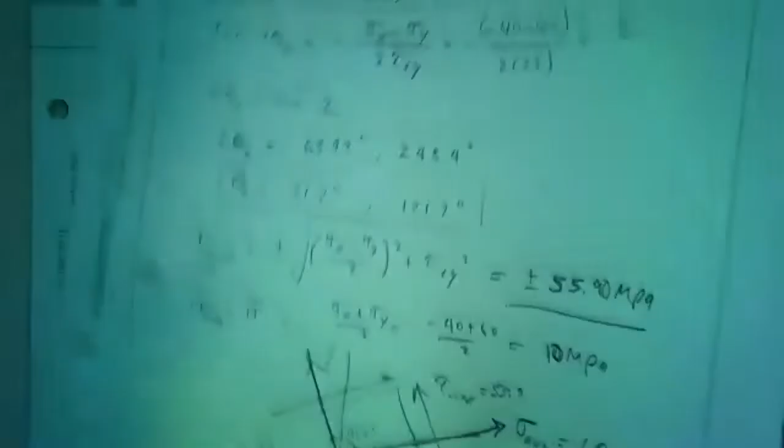All right, so let me show you another method. This method is called Mohr's circle. It's based on equations 7.5 and 7.6 that we derived last time. Where's equation... oh, there they are, equation 7.5 and 7.6. So I have derived these in my notes, you're welcome to go through it. It's on page 73 of my notes, where I take these two equations, 7.5 and 7.6, and I square them.

I rearrange it, so I'm not going to derive it. I'm going to show you the methodology, but I want to go through just a quick background on where this comes from. So I take these two equations and rearrange it. I put sigma x prime, and I brought sigma x plus sigma y divided by 2 to the right side, there it is. And then I square every term in the equation, so the left side is squared, the right side is squared. And I do the same thing with equation 7.6.

I bring... I guess I don't do that here. Okay, I just square everything. So I have tau x prime y prime squared, and then everything to the right there is also squared. And then those two equations are added together.

So it's not so important to know the derivation, but the outcome is important, and the outcome is the methodology. It lends itself to a circle, called Mohr's circle, for which you can now find stresses using a circle, and I'll show you how to do that.

So let's go through it again. Now we have these equations 1 and 2. We add equations 1 and 2, and in equation 1 and 2, obviously everything related to sine and cosine and theta is eliminated once we add them together. So we have the following equation once they're added together.

And in this equation, we substitute. We say sigma x plus sigma y divided by 2 is sigma average, which is exactly what we did in that example problem, if you remember. Our sigma average was sigma x plus sigma y divided by 2. And R, we're going to let equal what's on the right side here, square root of it. Therefore, we can write that equation.

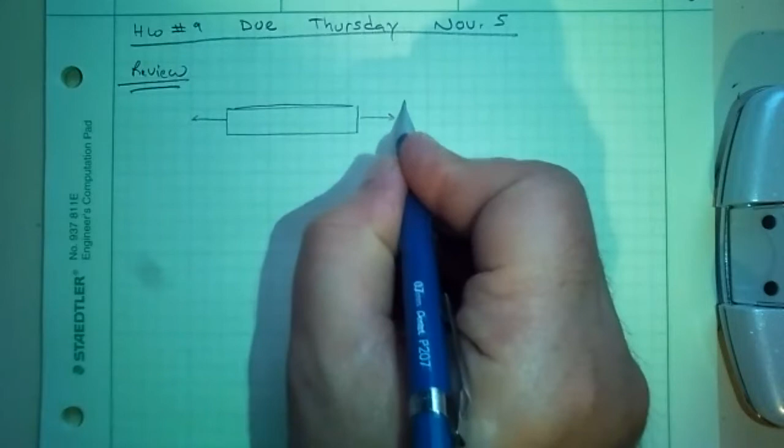If I have a simple bar, unidirectional loading, meaning simply I have P in the X direction. If you remember, the normal stress that I'll have, the maximum will be at 0 degrees.

And if I just simply take a stress element right there, that stress element will look like this. This is my x-axis, so I'll have sigma x, which is P over A. That would be my stress element. So this is an easy case, a simple one-directional loading.

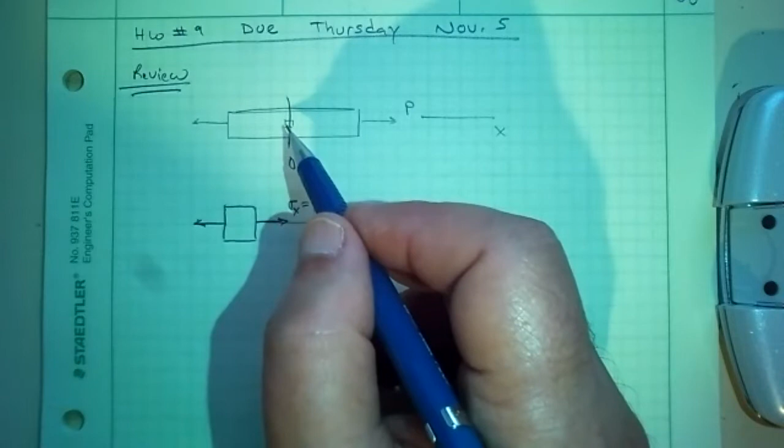That's what I'll have. And if you also remember, we found stresses at any oblique angle, and from those equations, I found what the maximum shear stress was, and also what the normal stress was at that plane. And if you remember, that occurred at 45 degrees. At 45 degrees, that's where my maximum shear stress was.

So if I take an element at that 45 degrees, it will be oriented like this, rotated from the x-axis. This element is at 45 degrees, and so forth and so on. We found out there was a shear stress on this face, and that was my maximum shear stress. If you remember, it was P over 2A.

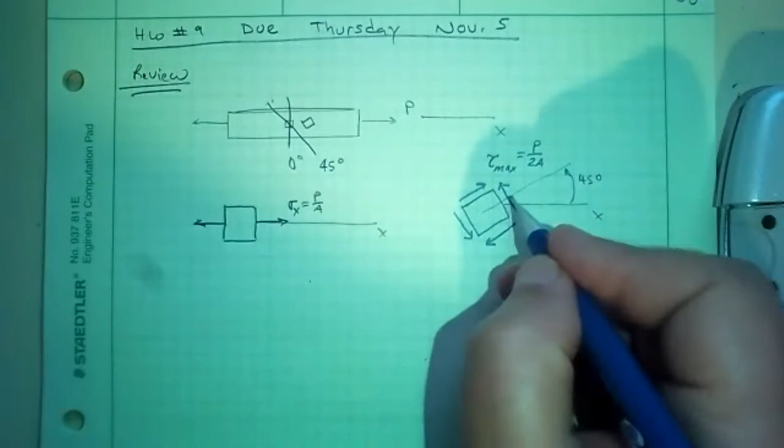And if that was there, we had shear stresses on all faces. And we said the failure, if it were to fail, it could fail at 45 degrees, depending on whether it's a brittle or ductile material, and so forth. So we've talked about that. And then we also said there was a normal stress on this face. We didn't identify all faces, but we just looked at this face.

And this was basically our sigma average. What does the book use? Sigma bar for average, which was P over 2A as well. So this was my sigma max, basically my principal stress. Sigma max is my principal stress. Principal stress is another name for maximum normal stress. So this was an easy case, we only had single directional loading, and that's what we had.

But here, in the problems we've been dealing with in chapter 7, or the situation we're setting up, is a case where we have stresses on all faces. Actually, I shouldn't say all faces, it's a plane stress problem, so it's really not on all faces, it's on two planes. Let's see what page I'm missing something here.

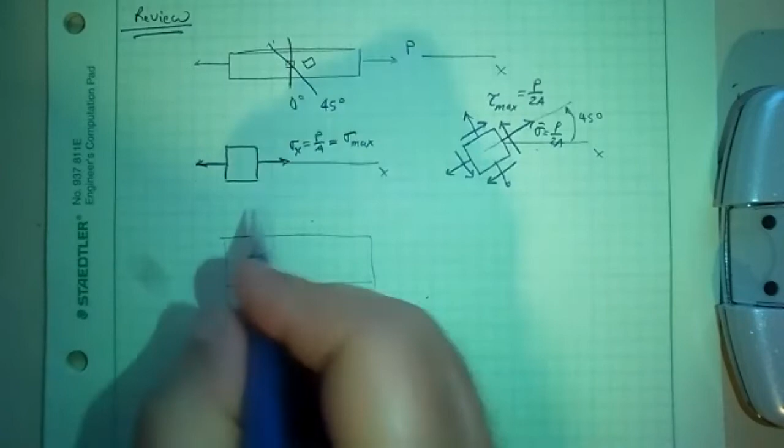Okay, so what we did last time, we had some structure for which we had different types of loads, different types of stuff. And we said this is a plane stress because all the forces and all the stresses are in the X and Y plane. So if we take a stress element here, it would have sigma X, it would have sigma Y, and it would have tau XY.

There's all that stuff. Look, what a big difference, right? From this to this. This was inside the member. That's that element at 0 degrees. So at 0 degrees, this is what we got.

So again, we found stress at an oblique angle just like we did for a simple case. And we took those equations and found the maximums. And those maximums are principal stresses.

And there is a third one too, in the third dimension, which we'll talk about later. So even though we're looking at a plane stress, there exists a Z dimension, a third dimension. We'll talk about that later, but here it's not an issue, the third dimension.

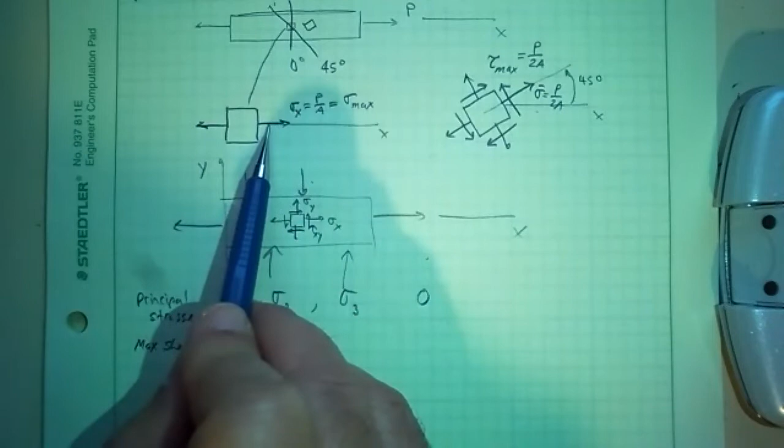We'll find that. Let's go back. The maximum normal stress occurred at 0 degrees. It was in the x-axis. This will not be. So the angle for which...

From the x-axis, where the maximal principal stress sigma 1 occurs, because sigma 1 is always greater than sigma 2, and that's greater than sigma 3. This is at theta p. That's the angle at which, from the x-axis, that sigma 1 occurs. So this is the angle. It could be from x or y-axis, but let's just say x-axis, where sigma 1 occurs.

And then this is the angle from x or y-axis, but I'm just going to use x. I typically use x, where tau max occurs.

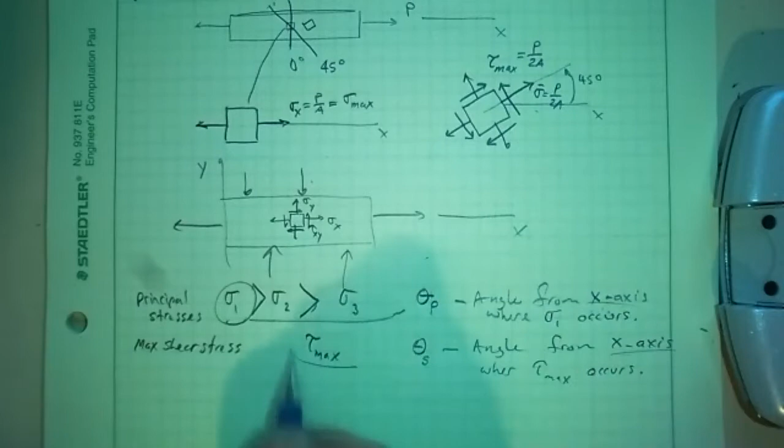So you can see a simple unidirectional stress. It's pretty easy. The normal stress occurs at 0 degrees or same direction as x. Maximum shear stress occurs 45 degrees from the x-axis, at which you have a sigma average. And sigma average occurs in all faces, by the way.

But in a case where you have a combined loading, this is called a combined loading, you have multi-axial loading. And this is a plane stress because all the stresses are in a 2D plane, the XY plane. There could be a structure for which you're loading in the Z direction as well. You have forces in the Z direction causing stresses in the Z direction. And we'll deal with that later.

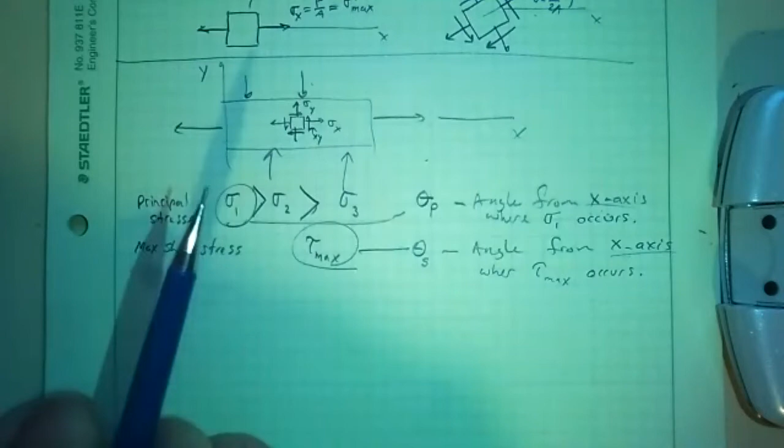So that's what we do. You can see the analogy, the similarity. We're basically doing what we did before, but in a case where we have a lot more complicated stress condition, and we have to resort to more powerful tools. It's not really that much more powerful.

It's those equations 7.5 and 7.6 that I derived. Equations 7.5 and 7.6 tell you the stress at any angle. And then the maximum of those, we set when we solve for the maximums, those are the principal stresses and the maximum shear stress. And in an attempt to solve those, we also need to know at what angle they occur, and that's what gives us this.

So now, like I said, the equations 7.5 and 7.6 will lend themselves, after some arrangement, into a form of a circle. And it's that circle that I want to teach you today. I want to talk about today.

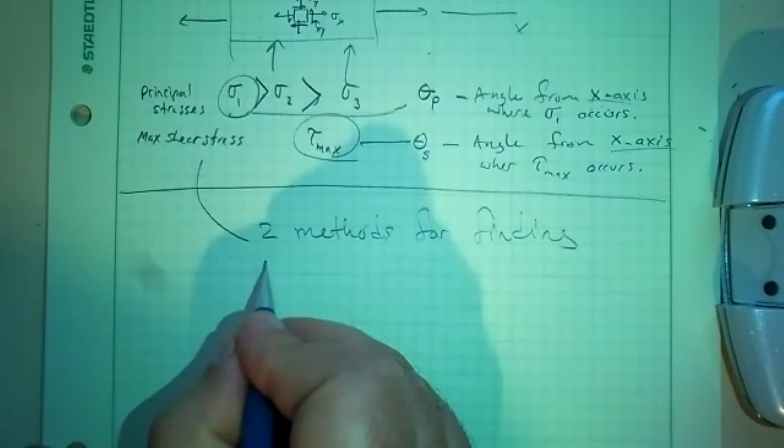So there are two methods for finding principal stresses, max shear stress, and theta S and theta P. S stands for shear, P stands for principal stress. And those two methods - the first one is these equations 7.5 and 7.6 and other equations that I have derived last time.

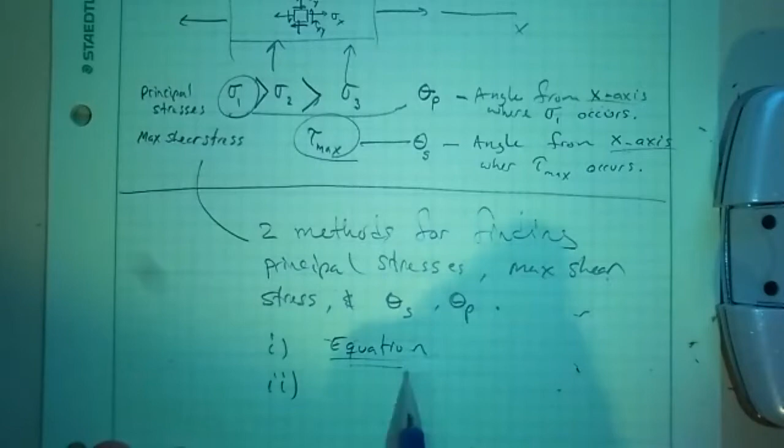Actually, once I take those equations, I've shown you that sigma 1 and sigma 2 are based on equation 7.14, and then tau max is based on equation 7.16 and so forth. So these are the equations. The second method, and this is, as long as you have the equation, it's pretty easy - you just plug in the numbers, right? The second method is called the Mohr circle.

And this Mohr circle is based on equations, and how these equations lend themselves into a shape of a circle.

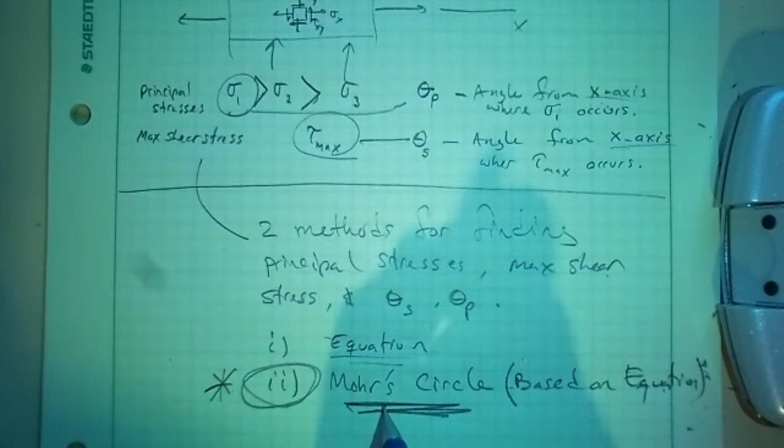This is the method that I will test you on. I don't care about these equations. As long as you have the equations, any high school student can plug those numbers in and get those. But the method that I will test you on over and over again, multiple times in every exam, is this Mohr circle. So please pay attention and ask questions. On the exam, I will say use Mohr circle. If you use equations, I'm not going to even grade it.

This is the method, because why am I so adamant about this method? Because this method doesn't require you to memorize these equations or even look anything up. If you know the methodology, with a piece of paper and a pencil, you can use this process.

And find principal stresses and maximum shear stress and their orientations. So keep in mind, this is the method you need to know. You need to know, obviously, how it comes about, but this is what we'll be doing extensively. So don't think it's going to be just a fleeting moment that you just have to do in one exam. We're going to use it twice. I'm going to give you two problems on the next exam which will use Mohr circle.

And again, I will test you on the final exam. So it's an extremely important method. It's also used elsewhere. Once you learn how to use Mohr circle, you can use it for other methodologies too in other classes. I don't want to get into that, but it's a useful method to know.

As a matter of fact, for our results, we found the principal stresses and we plot those, if you remember. This is the problem we did last time, exact same problem. We found the principal stresses and the principal planes - the angles from the x-axis are called the principal plane. So we use the equations, and at the end, for the result, we plotted the maximum principal stresses, sigma 1 and sigma 2, and the orientation at which they occurred: 76.7 degrees from the x-axis.

Then we also did the same thing for maximum shear stress. We found the maximum shear stress using the equations to be 55.9 plus or minus, meaning plus this way, minus that way on different planes. And then at that plane, we had sigma average, and that occurred at 31.7 degrees.

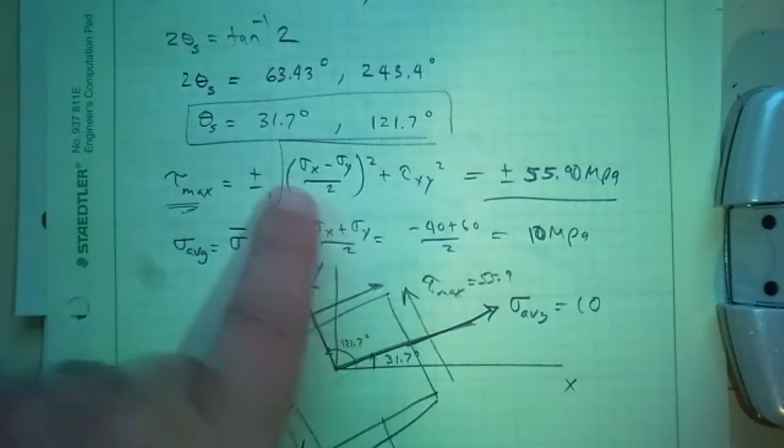So we have two angles, right? 31.7 and 121. Although the face is at 31 degrees, the face that's under stress is perpendicular to that axis that's 31 degrees. Same thing here at 121 degrees - the stress at that location is on the face perpendicular to that axis.

So this is part of the solution process. You must be able to plot that. All right, so we're going to do the same thing now using Mohr circle.

I'm looking for my compass. For this method, you're going to need a compass. Please obtain a compass.

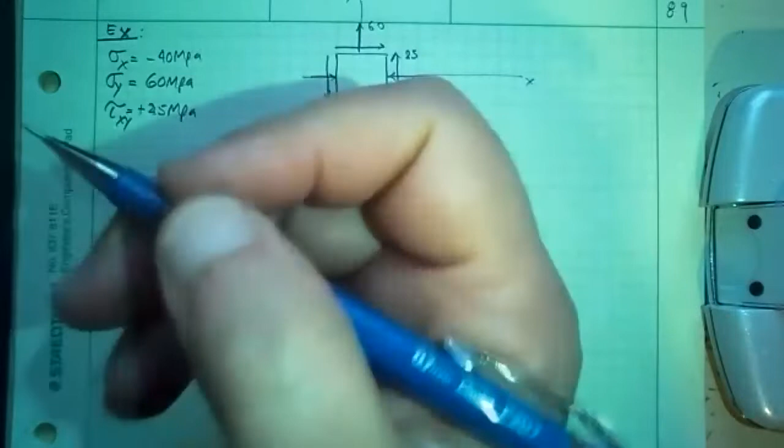Now, shear stress really doesn't have a sign, but in order to define the direction of this arrow, we put a sign there. Some literature puts a sign - let's say not we, I don't like the sign, but this book uses it. So plus, when they say plus, it means on the x face, it's going up. That's something you got to remember. So that's that, then we got this. Okay, so that's the state of stress.

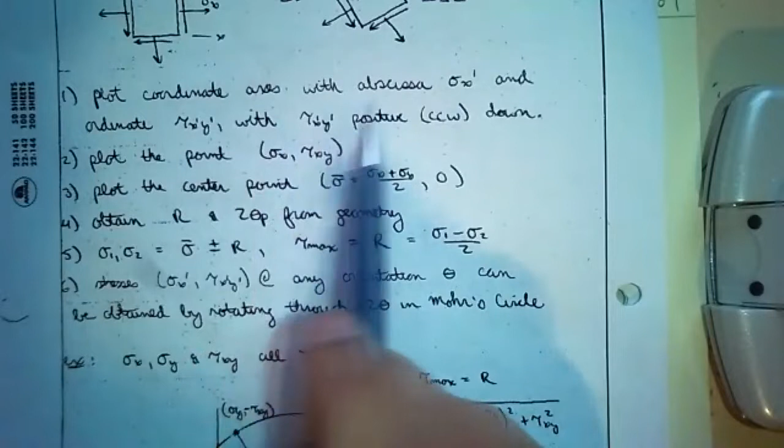Okay, so now we're going to draw a circle. The center of the circle will be at sigma average. So in my notes, on the page after page 73, I think, there's a procedure here, a procedure for how you do the Mohr circle. So you can follow this procedure. This is the book's terminology I'm using here - I prefer slightly different terminology, but that's fine. Plot the points, plot the center.

The traditional horizontal axis, what we call x, it's now positive normal stress. This side is negative normal stress. This is tau clockwise, and this is tau counterclockwise.

What does clockwise and counterclockwise mean? For example, if I'm looking at this shear stress, 25, that is going to rotate counterclockwise. If I'm looking at this shear stress, it's going clockwise. So that's what that means, and we'll talk about that some more.

In the book, they call this sigma prime and tau prime. I like this better. You can use the book's terminology, and I've used the book's terminology in my notes, but this is how I learned it. This is how I comprehended it, and it's really hard for me to change for whatever reason.

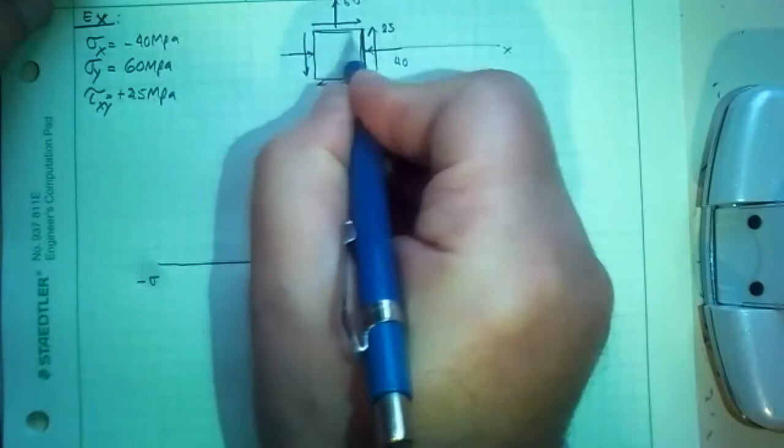So this is the importance of it, even though I wrote the notes using the book's terminology. What we're going to do is define stresses. This is called the X face. So here, this is the X face right there. And this is the Y face. The side perpendicular to the x-axis is called the X face.

So this is the X face. And this one is the Y face, or Y plane, whatever you want to call it - Y face and X face. I define the axis stresses on those faces. First of all, the X face - our coordinate system is based on sigma and tau, right? So this is our coordinates of any point.

I'm going to define the stress on the X face based on normal stress and shear stress on that face. Normal stress on that face is negative 40 megapascal. Shear stress on that face is 25 megapascal. And this is where I use clockwise or counterclockwise - look, this one is counterclockwise. On the Y face, on this face, the normal stress is pulling on it - it's 60 positive. Shear stress is 25, but it is going to be clockwise.

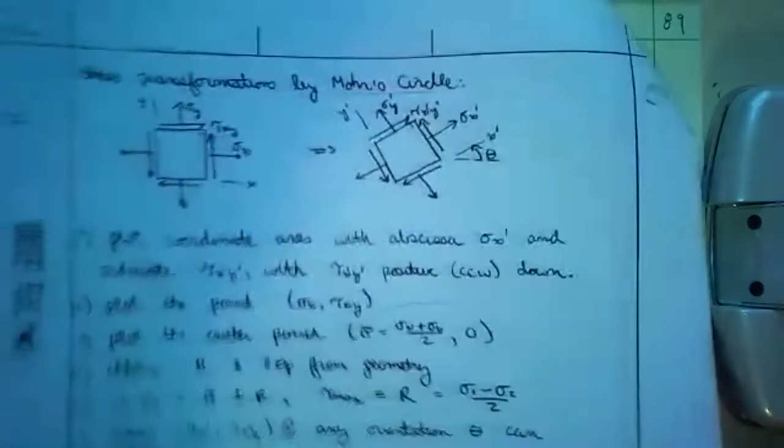So now I've defined stresses on two faces - the faces of my original stress element that is oriented in the x and y axis. Now I come to Mohr's circle and I plot these 2 points. The steps are all there, right?

Plot the coordinate axes - well, I'm calling it this and this, but it's tau and sigma, positive being counterclockwise. I like it a little different - plot the point sigma x, tau xy, sigma x, tau xy, and so forth. This is what we're going to do, with all the processes there in a different terminology, but this is what I have. Let's see, I am going to mark some points here.

The circle is going to get big - all right, that's going to be too big. I should have drawn that differently. No, I'm going to modify my axes. The circle is going to be really big, so I'm going to change a little bit my axes.

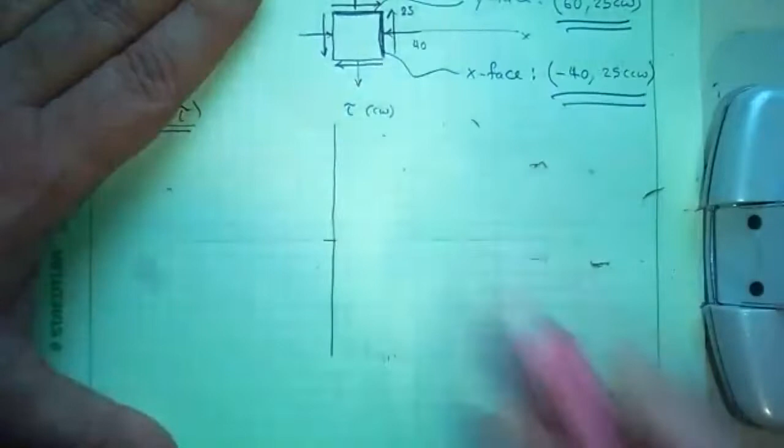So over here, tau counterclockwise, positive sigma, negative sigma. All right, that's what we got. So 10, 20, 30, 40, 60... 10, 20, 40... 30, 40, 50, 60. All right, so this is what we got.

Each increment represents 10. I'm going to plot minus 40 and 25 counterclockwise. Minus 40: 10, 20, 30, minus 40. And then 25 counterclockwise is right there. 10, 20, 30, minus 40, and then 10, 20, 25. All right, so we got that.

And then we're going to plot my other point, 60 and 25, clockwise: 10, 20, 30, 40, 50, 60... 10, 25. There - it's going to be a huge circle. You can draw this to scale - not that you can, you should draw this to scale. All right, so once you do that, you connect the 2 points, draw a line connecting the 2 points and extend it outward.

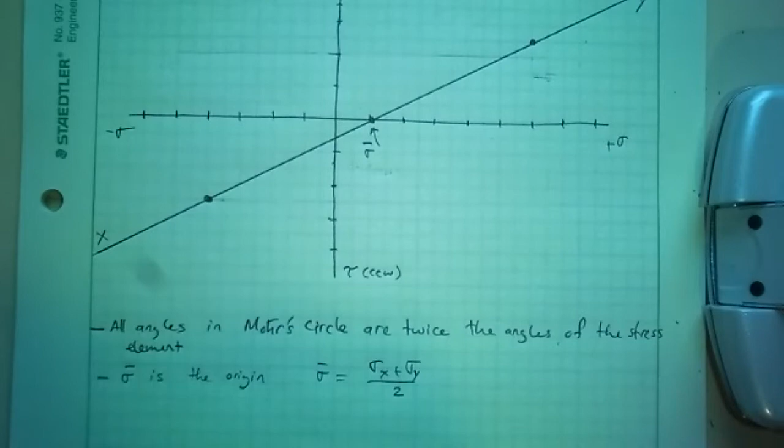So the center point, sigma average, is the origin. And sigma average is sigma x plus sigma y divided by 2. The coordinate of that point is sigma average and 0, right? Tau is 0, so keep in mind we're on this coordinate, sigma and tau. So sigma average and tau is 0.

So let's find sigma average. In our problem, sigma average is sigma x which is minus 40, sigma y is 60, divided by 2, so that's 20 divided by 2, it's 10. 10 MPa.

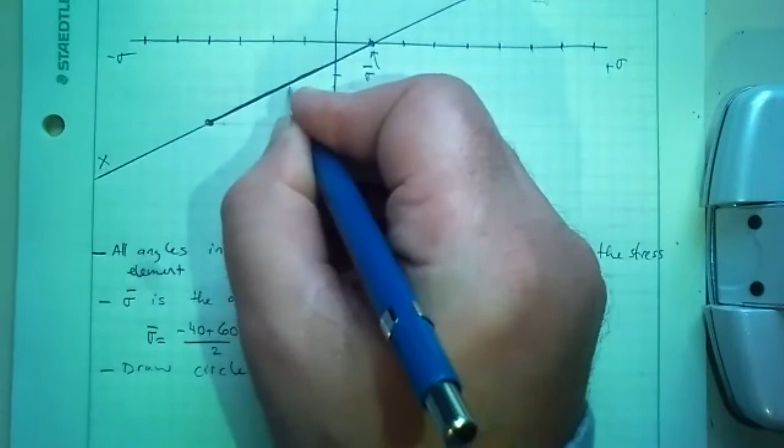All right, so now I'm going to draw a circle. This is slightly different than my procedure here, but it's all the same. Draw a circle with center at sigma average and the radius r. That radius r is this - this is the radius r. We'll calculate r in a minute, but that's r. So I'm going to draw the circle now.

All right, so I should extend this. Okay, so that's my circle with the radius r. So let's find what the radius r is. First of all, we need the two sides of this. I'm going to set up a right triangle - that's how you do it every time. It's a right triangle.

This right triangle will have two sides. This side of it is 25 - the height of it is 25. The base of it is going to be, let's see, this distance - sigma average is 10, right? Yeah, that's 10, so this is 10 from here to here. And from here to here, we plotted this point, we know the coordinates of that point - this is 40, right? This is 40. The distance is 50.

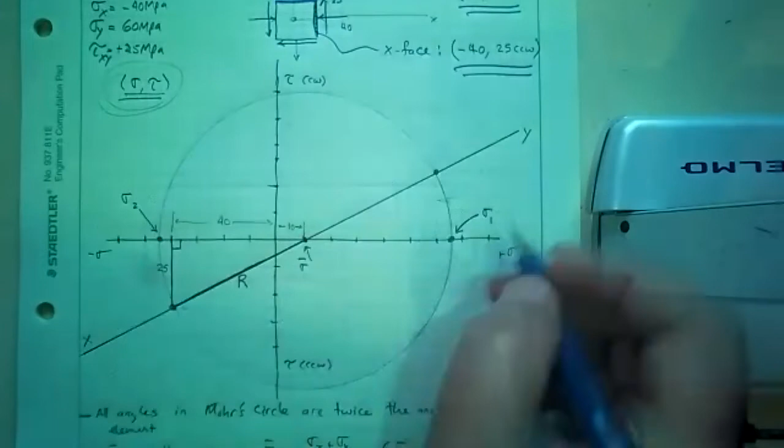The maximum shear stress occurs - so the coordinate of that point is sigma 1 and 0, the coordinate of this point is sigma 2 and 0. I need the extremes of this circle. So let's see, this is the highest shear stress right there. This point is at sigma average and tau max, but this tau max is clockwise. The point down here is still at sigma average and it's still tau max, but this is counterclockwise tau max.

All right, so those are the angles that I need. I can find the angles I need in a minute. But any questions thus far?

So if that's R, this is R, and also this is R, right? This is the radius of the circle, doesn't matter which is the radius. So I can find sigma 1 and sigma 2.

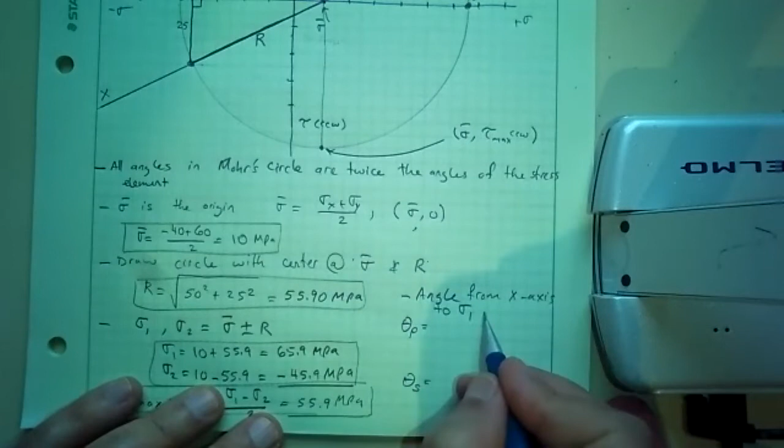Well, first of all, I'm going to define them on the circle. So theta p is the angle from the x-axis to sigma 1. That's theta p. I'm going to calculate that.

Theta s is the angle from the x-axis. I like to use the x-axis. The book uses various different axes. They're all the same, you just have to pick an axis and get the angle from that axis. But I like the x-axis. That's why I identify x and y axis. I prefer you use my method.

Angle from the x-axis to the closest maximum tau max, to the closest tau max. Why do I say closest? Well, because there are two of them.

There are two of them, right? There's one over here, one over here. This is my x-axis. The closest one is this one. I can go from here to here, or I can go from here to here. The closest angle is this.

What else? It doesn't make a difference. You can do it to either one, as long as the orientation is correct, then your maximum shear stress element will be the same. The results will be the same either way, as long as you orient the angle properly. Because if I go from the x-axis to the closest one, this is counterclockwise. If I go to the other one, it's clockwise. So I've got to keep that orientation in mind.

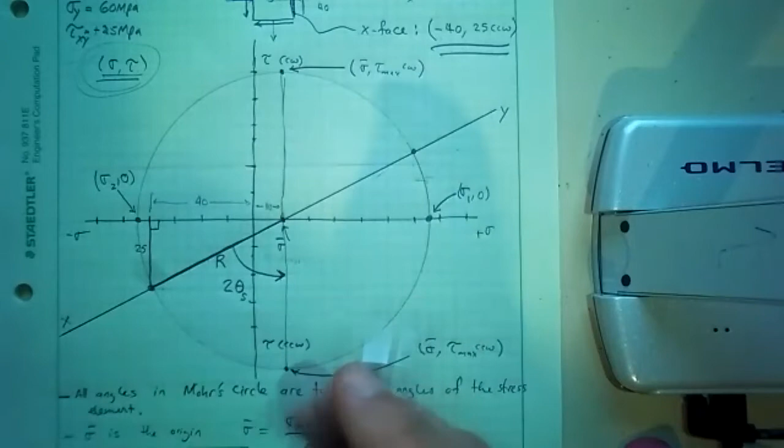The other angle, theta p, is the angle from the x-axis to sigma 1. Well, there's two ways to get to sigma 1 from the x-axis. Here's the x-axis, sigma 1 is over here. I can go this way or that way. I'm going to go the closest way. It doesn't matter, as long as you take into consideration the clockwise or counterclockwise direction of the angle.

So this angle I'm going to call 2 theta p. So again, go to the closest route.

Any questions about how I identified these things? I'm good, Professor. Good.

If you follow what I'm doing here and you identify like I've shown, and do the angles as I've requested, it's a really simple process. And again, if you know this process, it lends itself to doing this anywhere at any time without any books, references, or equations. It's all based on the geometry of a circle. Nature is a wonderful thing. Even in deriving equations for stresses, it lends itself to a geometric shape.

Okay, so let's find these angles. We're going to find these two angles. First of all, we're going to do theta s. I know the angle between these two is 90, and I can easily find this angle here because I have the sides of this triangle, and I even have the hypotenuse. I'm going to call this angle theta.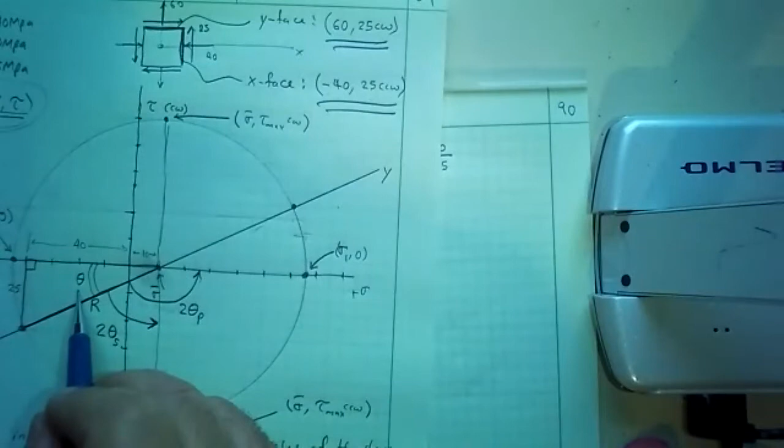Why? Well, I guess I can call this 2 theta. I guess I can - I don't know, maybe a book does. I'm just going to call it theta. So that angle - do I want to call it 2 theta? I guess it doesn't really matter, I don't have to reference that to anything. But I'll call it 2 theta.

So 2 theta is 50 over 25. Is that right? No, I'm wrong - tan is opposite over adjacent. Okay, so this is 25 over 50.

So we can find the angle 2 theta as tangent inverse of half, which is 26.565 degrees. Okay, so that's my angle.

So if that's this angle, then 2 theta s is 90 minus that angle. Does everybody agree? This is 90 degrees between here and here. So 2 theta s is 90 minus 2 theta. Everybody's with me on that one?

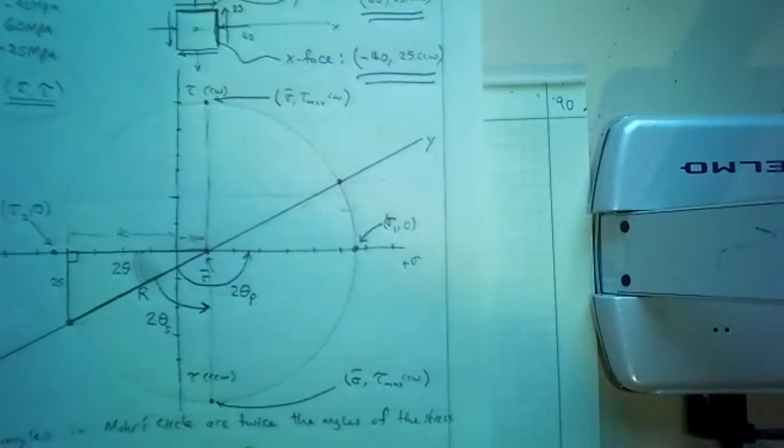So this 2 theta s is 90 minus 26.565, which is 63.435. And I'm going to find theta s - it's half of that.

31.7175. Oh, and I also need the orientation of this angle. So this angle, look, counterclockwise - so I am either, you can put this or you can put counterclockwise, either one. But this is the answer - either or, you have to have a direction. And this is meant from the x-axis.

Well, I can write 'from x-axis' to be more clear - 2 theta p. So I found 2 theta s, right?

2 theta p is 90. The angle from here to here is 90. 2 theta p is going to be 90 plus 2 theta s. Does everybody see that? Again, all from the geometry. 2 theta p is equal to 90 plus - got to be careful - 2 theta s, not theta s.

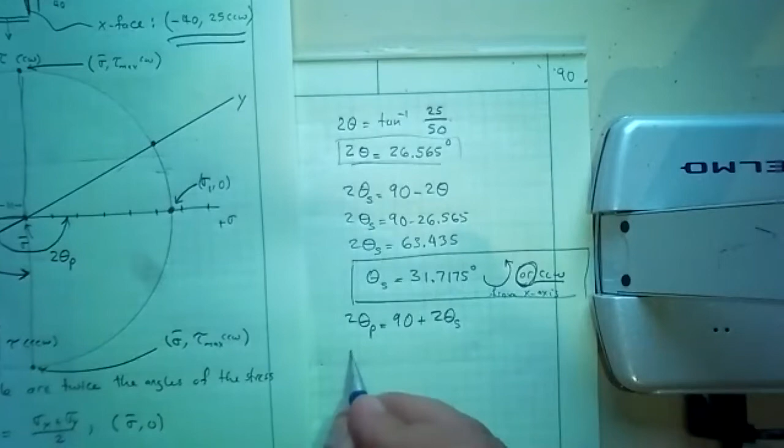So 2 theta p is 90 plus 63.435, which is 153.435. I need theta p, that's half of that - 153.435 divided by 2 is 76.7175 degrees. I'm carrying it a little too far, but 3 decimals would be good enough.

And this is also counterclockwise from the x-axis. And everything starts at the x-axis, see?

Okay, I think we have everything now. Oh, no, we don't have everything, do we? Yeah, we have everything - we got all the stuff that we need. We found sigma 1, we found sigma 2, we found tau max, we found sigma average, and we found the orientations of the angles.

So in the Mohr circle, you need to identify clearly your x and y axis. You need to identify your coordinate - what do you call these things? What is the x-axis? Is there a sigma axis? We call those what? Coordinate axis, right? Ordinate and something else. Anyway, okay, so that's that.

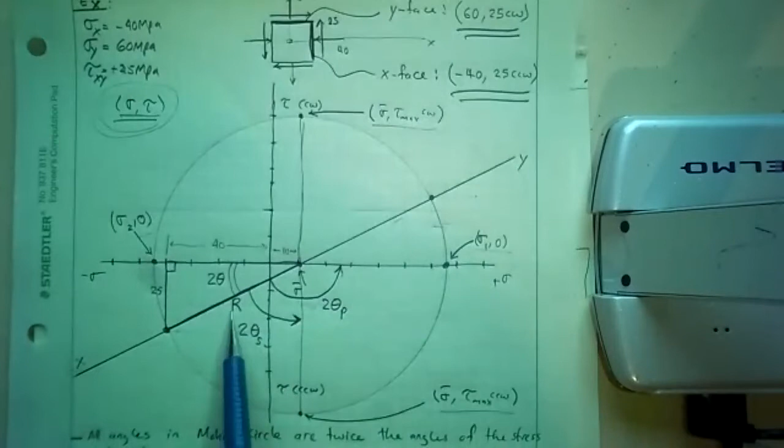And also you need to identify where your principal stress is, like these points. You need to identify the shear stress points, maximum shear stress points. You need to identify the angles, to identify the radius. All the stuff that I did here is required when I grade your exam or when you do the homework problems. So please be very concise and detailed, just like I have done it.

Arrows start to define angles - start from the x-axis, end at the closest shear stress. There are 2 maximums - one over here, one over here. The perimeter of the circle is what defines the stress at any state. See, we are finding perimeters, right? The extremes. So if I want to find stresses at a particular orientation, it's all on the perimeter of the circle, and I'll show you that.

Any questions about Mohr circles so far? We're not done yet - we still have to take all the stuff that we just derived or calculated and plot the actual stress elements oriented at theta p and theta s. But before I go there, anything that remotely raises a question or you have a concern about, I want to answer.

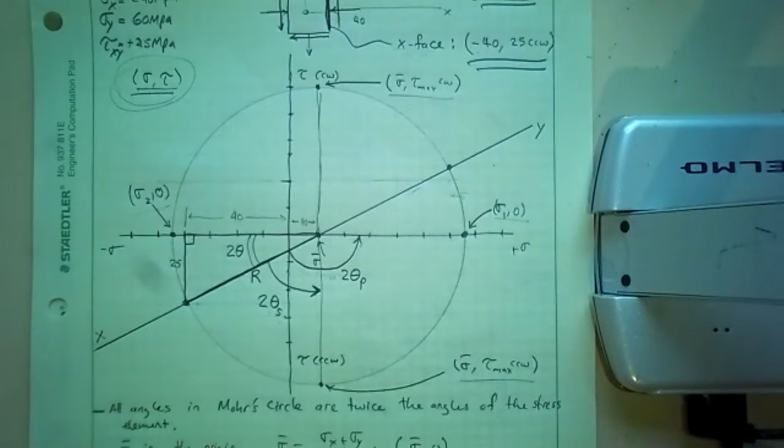Can I see the bottom of that page real quick? I think I missed something. Thank you.

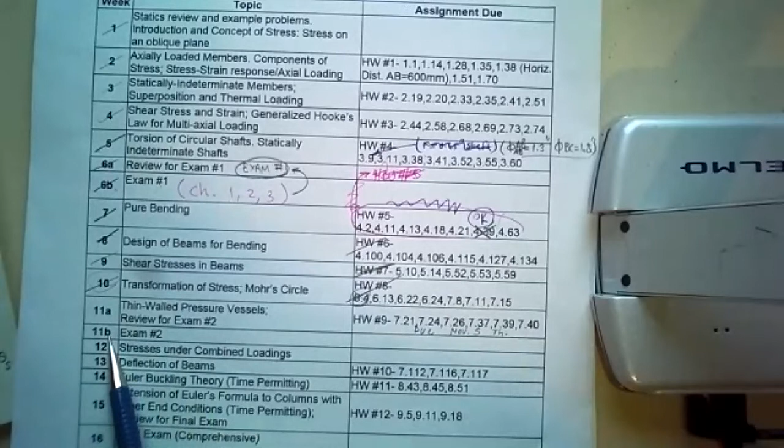This says next Thursday we have an exam. But I'm going to move that to a Tuesday after, because I still want to cover more material. Let's talk about moving the test, is that okay, everyone? I'm going to move this test. So based on our syllabus right now, we should be having test number 2, our second midterm, a week from today.

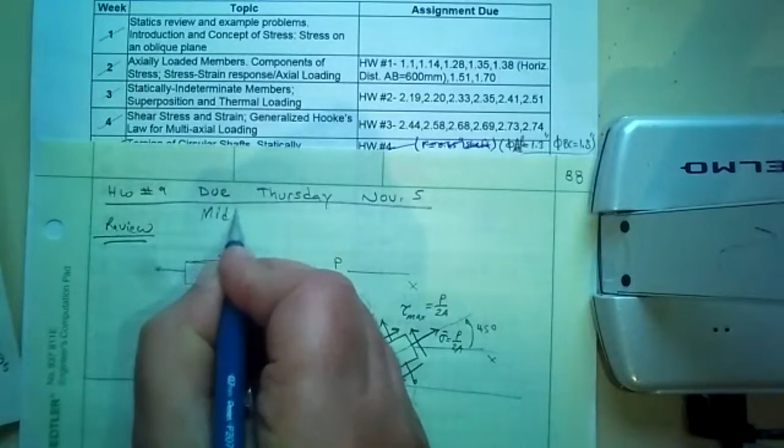I'm going to move it to Tuesday of the 12th week. Tuesday, the 12th week. Let's see, what day would that be? Let's make a note here so I won't forget. So that'll be the 10th. So our midterm 2 is on Tuesday, November 10th.

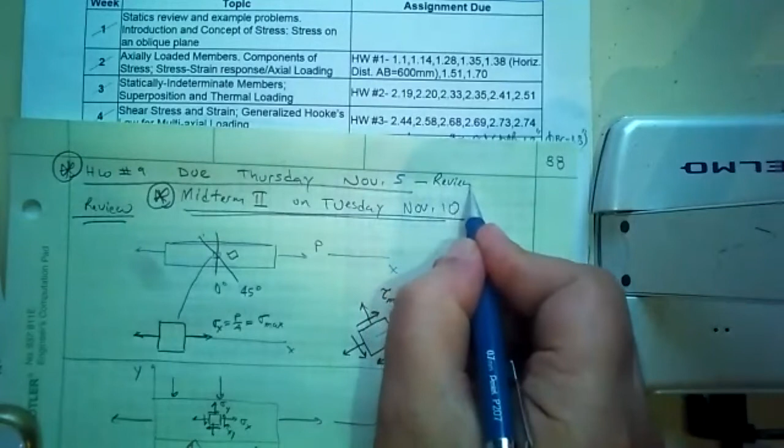So on Thursday homework is due, and then we'll also review for the midterm on Tuesday. Is that okay with everyone? Sounds good to me. Sounds good. Okay, good.

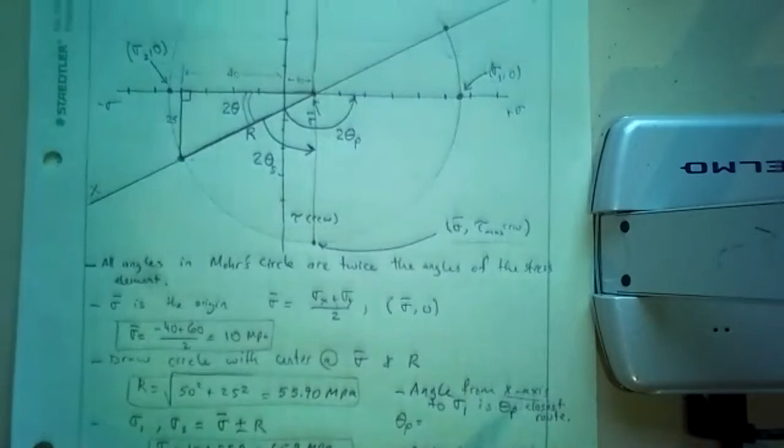Mohr's circle is a major part of your next exam. All right, so we have found a lot of stuff. Now we need to plot the state of stress. So basically what we're plotting first is these two points. First, I have a reference based on the x-axis, the location of this point. From the x-axis, I go counterclockwise, in the real world, in the realm of the element of the material, 76 degrees from the x-axis, and I end up at this point. So let's do that.

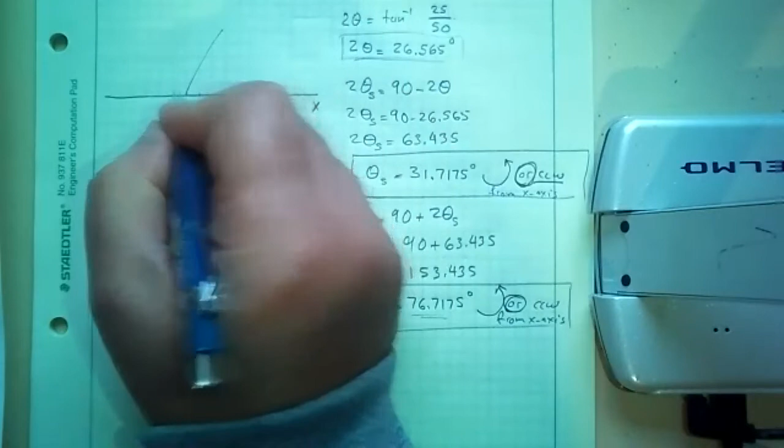So if this is my x-axis, I'm going to do this one first, 76 degrees from the x-axis counterclockwise. Let's see, that would be 90, so 76. Let's just say this is 76 right there. I could draw this to scale too, by the way, right? I don't have anything to draw the angle properly, unfortunately. But that doesn't matter. I can approximate it. So if that's 90 and that's 45, let's just say this is 76.

So here it is. Oh, I went the wrong way. No, that's right, counterclockwise. So from the x-axis, I went counterclockwise, 76, this is theta p, 76.71 or 77 degrees approximately, right? Is that good? So on this face, that's the face perpendicular to that plane.

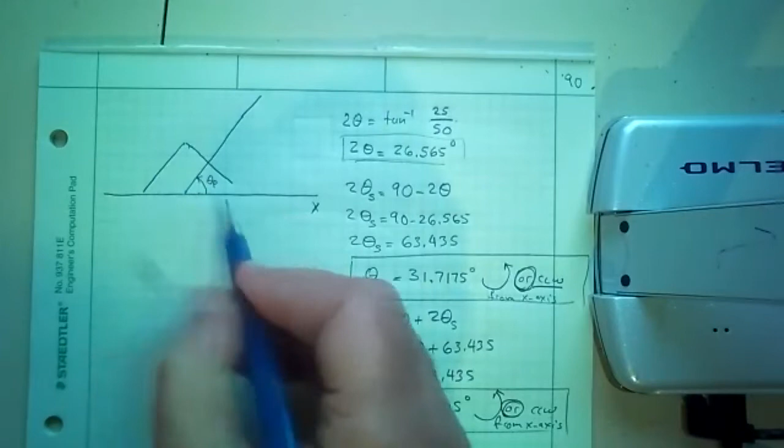I will have sigma 1. So I'm going to draw the whole square. This is where, look, from the x-axis, I go twice that, twice the 76 degrees, 153. I end up at, so think about you're on the perimeter of the circle. You're on the perimeter. You go from the x-axis, 76.71, but in reality, on the Mohr circle, it's twice that, 153 degrees.

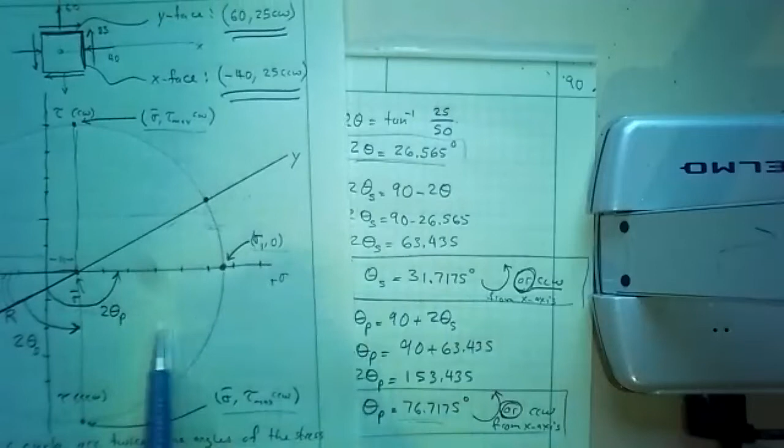You end up this point. So that point is on this face. So on that face, we have sigma 1, which is 65.9. I have sigma 1, 65.9. And as far as shear stress, 0. So I am plotting the coordinates, these coordinates, sigma 1 and 0. If that's the case, I have to have sigma 1 and 0 on this side.

And how about these faces? Well, look, if I go 90 degrees from this face to this face, I end up here. 90 degrees counterclockwise, or I can go 90 degrees clockwise. Either way, you guys agree? This from here to here is 90 degrees, right? This is clockwise, this is counterclockwise. So let's see what we got.

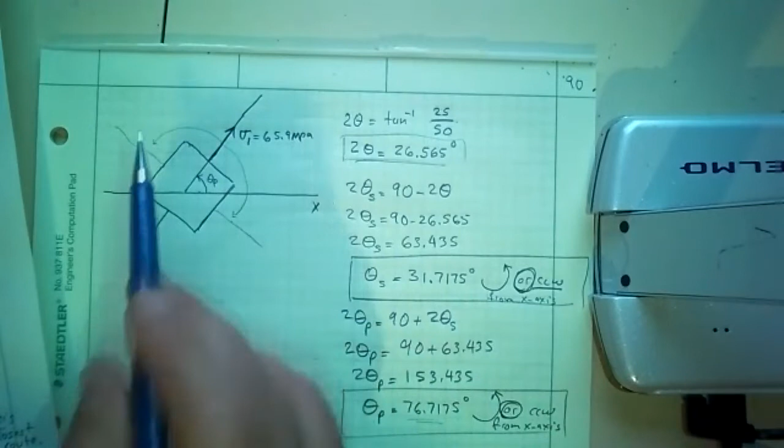Well, I'm going from sigma 1. So look, sigma 1, I'm right there at this point. This point represents that face. Everybody see that? Put both of them on here. This face represents that point.

All right, so again, this point is represented by this face. Sigma 1 and 0, sigma 1 and 0. So I go 90 degrees either direction. 90 degrees, 180 here in the Mohr circle. So look, 180 degrees either way, I end up exactly at the same point. Sigma 2 and 0. So 90 degrees counterclockwise here equates to 180 degrees here. Counterclockwise or clockwise, I end up at the same point. Sigma 2 and 0. Sigma 2 is minus 45.9.

So on either face, I don't want to do a double negative. In reality, if I want to write it as sigma 2, I am going to put a double negative, 45.9. Be aware that the literature, and I'm not the only one doing this, also does a double negative. Depending on what book you read, somebody will have a double negative like this, somebody will put no sign here and show the negative that way, but either way. So both of these are sigma 2, and that's what we expect. This has to be in equilibrium. It has to be in equilibrium.

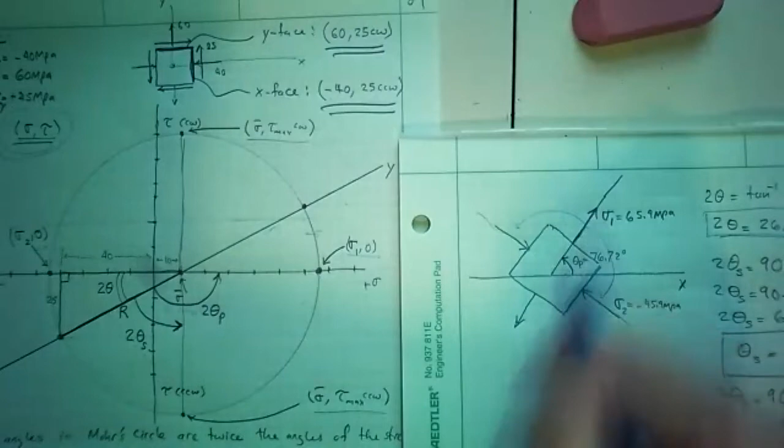Notice how I define this angle. I started from the x-axis, and my arrowhead ended up at the sigma 1 axis, where sigma 1 is, or the principal plane. Exactly like this, exactly like what I had here. So all that works out. Any questions so far? I want to stress one more thing.

The book might do this, and that's perfectly fine. It's not my methodology, but it gives you the exact same answer. Instead of taking 2 theta p from the x-axis to sigma 1, they might take this to be my 2 theta p, which I'll call 2 theta p prime, and I'll show you we get the exact same result. So this angle, 2 theta p prime, is the same as 2 theta, agreed? But it's going from the x-axis to sigma 2, 0. Let's figure that out.

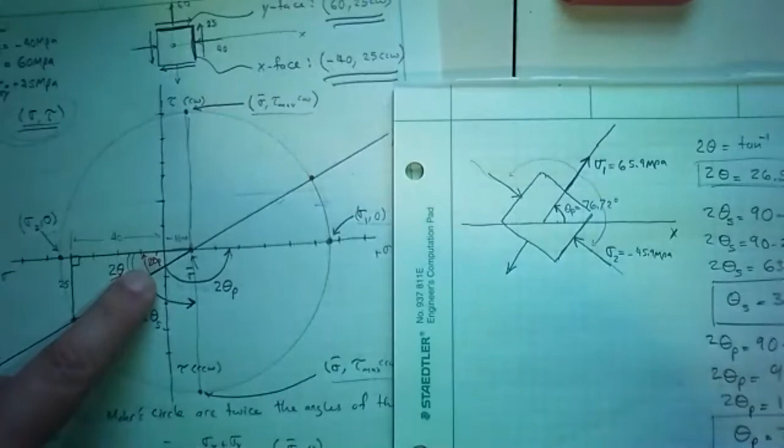Let's write that, and I'll show you it's exactly the same thing. So based on what I have defined, my 2 theta p prime is the same as 2 theta, which is equal to 2 theta. I have theta up here somewhere: 26.565 degrees.

Notice also the direction of that arrow. This is now clockwise. But we end up where? We end up, if you go from the x-axis, at sigma 2. So from the x-axis, clockwise 26.56 degrees, I end up at sigma 2. That's what this says. From the x-axis, I go half of that. Is that the angle?

Yeah, I go half of that. So this angle is theta p prime. Theta p prime is going to be approximately 13.28 degrees, and it is clockwise. Well, look, if I go 13.28 degrees, 13 plus 77 is about 90 degrees, right? These sides are 90 degrees from one another. I end up at sigma 2 and 0, which is exactly the same thing.

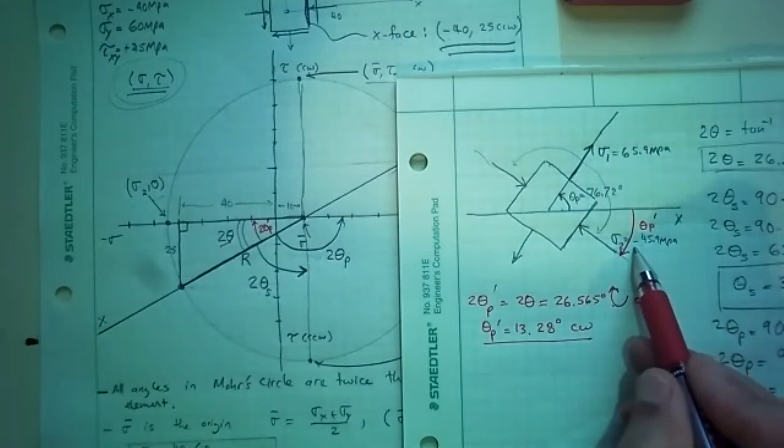So if I end up at sigma 2 here, 90 degrees from it in either direction -- 180 in the Mohr circle, but 90 degrees in either direction -- I get to sigma 1. So it doesn't matter; I could use that angle or this angle, as long as I know the orientation of the angle and where it ends. I end up at sigma 2 here. If I go this way, I end up at sigma 1.

So it doesn't matter. I like to do it from the x-axis to the largest principal stress, sigma 1. I like to take from the x-axis to the closest tau max for theta s and so forth. But I wanted to show you that that's exactly the same thing: theta p prime plus theta p is 90 degrees. Pretty amazing stuff. It gets me. This is what I live for. It's kind of exciting for me.

But anyhow, might not be the same for you. So we took care of this. We want to also plot the orientation of the maximum shear stress -- exactly at what angle does it occur. Well, we know that; we need to plot it. So this is from the x-axis, 31.71 degrees, and I took half of that, right? This was counterclockwise as well. So here I'm going to draw that. Here's my x-axis.

31 degrees, so it'll be more like this. 45 would be like that, 30 -- so this is theta s. Again, this is clockwise -- I'm sorry, counterclockwise. So if I draw the faces there, it's going to be a little bigger than the last one.

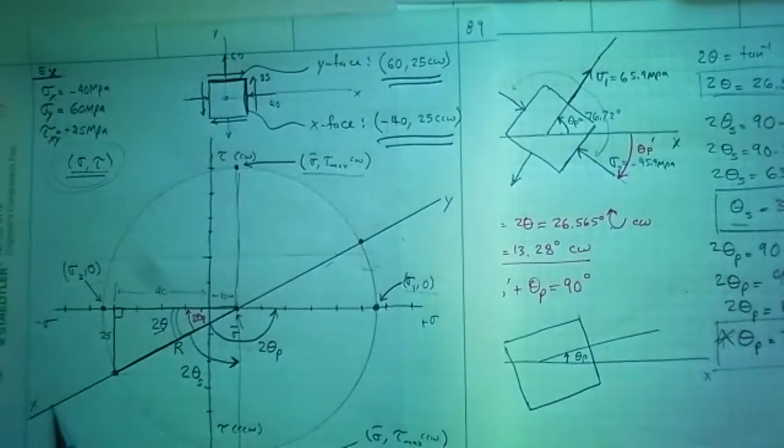This is my stress element. On this face, that face is on the Mohr circle. So look, I went from the x-axis -- this is the x-axis -- to theta s, going counterclockwise, and I get to this point. So again, on the perimeter, I get to this point.

Sigma average and tau max counterclockwise. What was sigma average? I have it somewhere -- 10, positive 10. Sigma average is 10. Tau max was counterclockwise. This is clockwise, this is counterclockwise like that, so this is my tau max. And that was the radius of the circle, which was 55.9. So I have a sigma average here, and a tau max opposite.

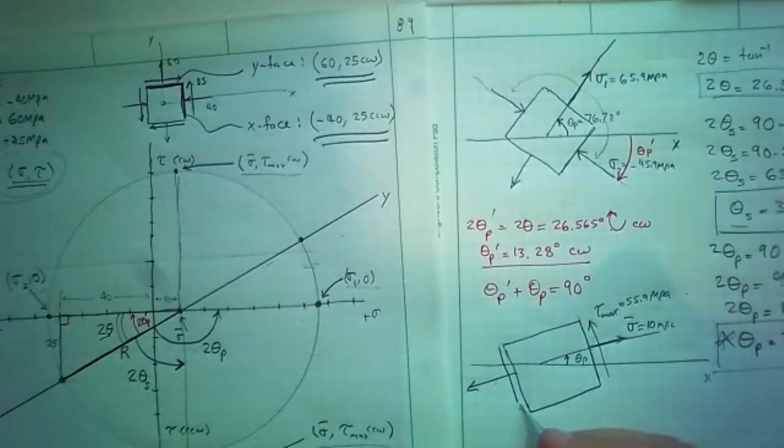All right, so that's that point. And then I have this point. So look, 90 degrees either direction, 90 degrees here, 180 here, either direction, I end up at this point. So 90 degrees in either direction, I end up on this face and this face, these two faces.

So either direction, I end up on top, sigma average and tau max clockwise. Again, I still have sigma average. Either direction gives me the same thing, but the tau is clockwise, clockwise tau. Clockwise, right there.

So there it is, this is the entire Mohr circle. It doesn't take long at all. Obviously it took a little bit of time because I had to explain it, but it's all based on the geometry of this circle, and you're always on the perimeter of the circle. You're plotting these two points with respect to the x-axis for the principal stress plane. There it is. You're plotting these two points for the maximum shear stress with respect to the x-axis, 2 theta s. There.

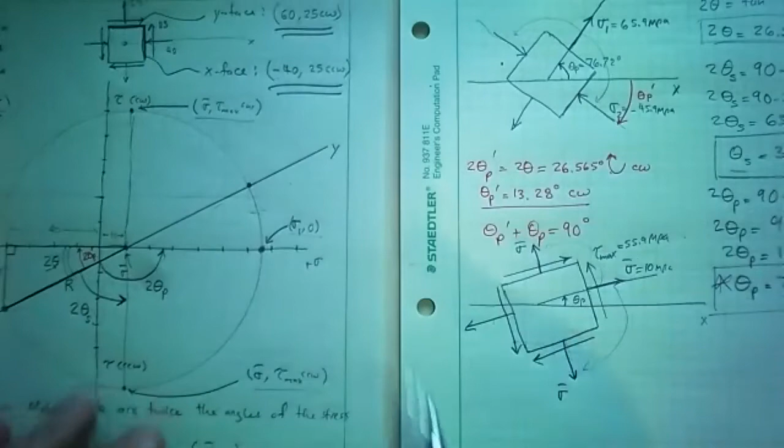You can draw this to scale, use a scale to calculate these, but why not just use the equations? It's simple equations based on the sides of the triangle and so forth.

Any questions? In a nutshell, that is a Mohr circle. You don't need to be memorizing difficult equations.

And you said we're definitely going to see this on the exam coming up? You're going to see it in every exam from now on.

Because we're going to actually now start getting into analyzing complicated structures, multi-directional loading, so a combined loading situation. And for a combined loading situation, if I want to find what is the maximum normal stress or maximum shear stress, those will be the failures. If I want to know what they are and what orientation they occur, this is the only choice I have.

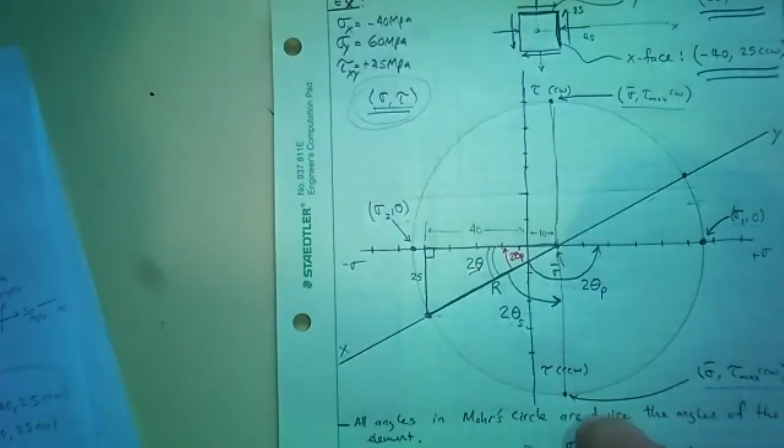So yes, you're gonna use this from here to the end of the semester. Another beautiful thing about this is, like I said earlier, it predicts the stress at any orientation. So if I have fibers of some material oriented in a certain direction, or if I have a weld oriented in a certain direction, and I want to find the strength of the weld or the stresses at the weld, I can use this very easily. I can use this very easily.

So how much time do I have? Maybe I can show you that. That will take more time. I'm not gonna. Let's see, do I have an example? Let's see what I got. Yeah, I have to do these next time, these will take a long time. What else do I want to say right now? 15 minutes.

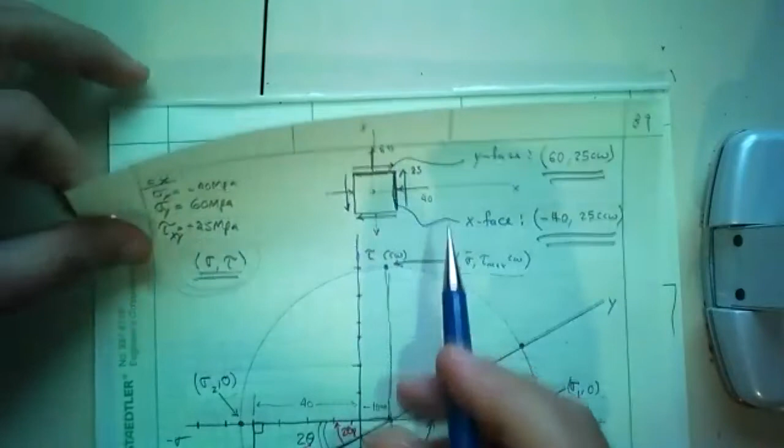Well, I can take this example problem we have. We can expand it. So let's say this particular stress state was inside a piece of wood. So this is a piece of wood. And the loading was such that if we take a stress element, and whatever the loading is, there's some loadings, there's some stuff going on that results into, and I'm not obviously predicting this correctly, it all depends on what's going on, but it comes down to, these are the stresses. This was 60, this was 40, and then there was a shear stress. This is the problem we just did, right? And this is my x-axis, this is my y-axis, and so forth. So that's the state of stress we just dealt with.

But let's say this piece of wood, it doesn't have to be a piece of wood, let's say it was a piece of steel. Let's say we wanted to know the stresses. If it's a piece of wood, maybe it had fibers that were oriented. Let me pick an angle, not coincide with anything I just did here.

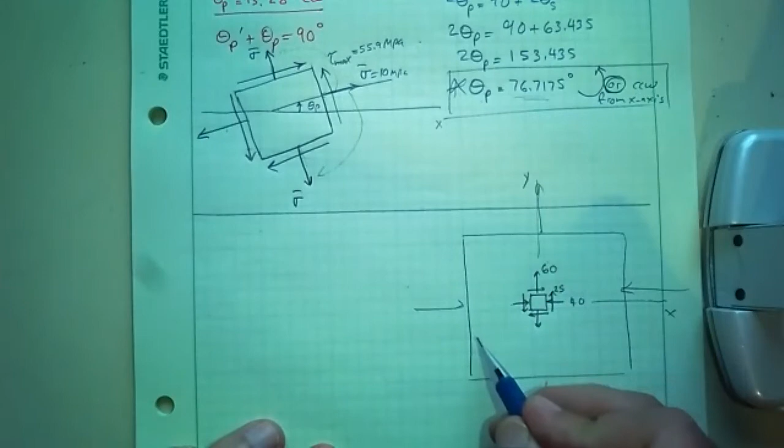Had some fibers. Or maybe it was a piece of steel, and the steel had welds on it. It started life as maybe, I don't know, maybe it was welded across here to join two material. And so this is the weld. Or it could be a piece of wood with fibers running that way. It doesn't really matter. When we knew the orientation of that weld was 10 degrees, or the fiber was 10 degrees from the x-axis.

So in reality, I want to know what kind of stresses are pulling this thing apart and what kind of stresses are shearing at this weld. I'm going to call this sigma weld, and tau weld. When you weld something together, the two important stresses are what's pulling it apart in tension or compression, and what's shearing it—the sliding shear. These are the two important stresses we need to find for that particular weld, or if it was a fiber, for that fiber orientation of strands.

A composite material, wood is a composite material. And obviously that occurs 10 degrees from the x-axis. The fiber is 10 degrees from the x-axis.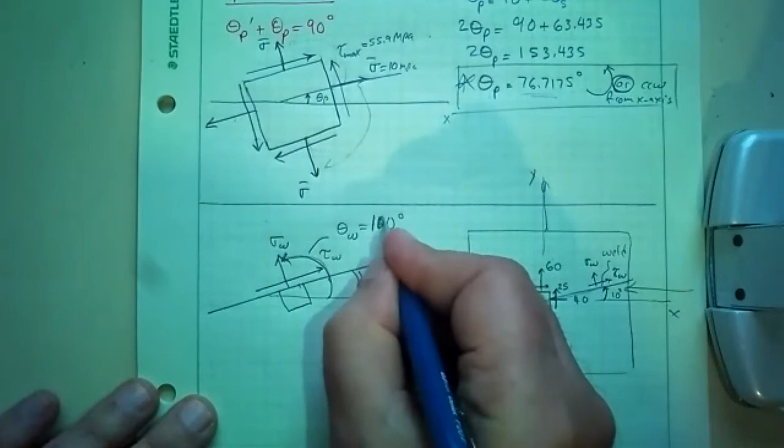But that face itself, if I were to do this on a stress element, if I construct the stress element, and this is my x-axis, I need to go all the way to that point. I'm going to call this theta W, and theta W, this angle again, is 10 degrees. But I need to go from the x-axis to that particular face—that would be 90 plus 10, so 100 degrees. I'm making this up as we go, and I hope it works. It is going counterclockwise from the x-axis.

So what is my stress, sigma W and tau W? The weld stresses. Because on the weld, these are the stresses acting on it—the maximum normal stress and the maximum shear stress. If the weld can withstand those, it will be a safe weld. The weld will have some requirements: how much normal stress can it take before it fails, and if I try to shear the weld, what is the maximum allowable shear stress? Those are usually given to me.

If the weld is properly welded, it should be stronger than the base material. So the weld should be withstanding, and the base material could crack or fail if the weld is done properly. But we want to calculate that here, based on stresses on this stress element oriented in X and Y. We can calculate those based on a given scenario, and I'll show you how to do that later.

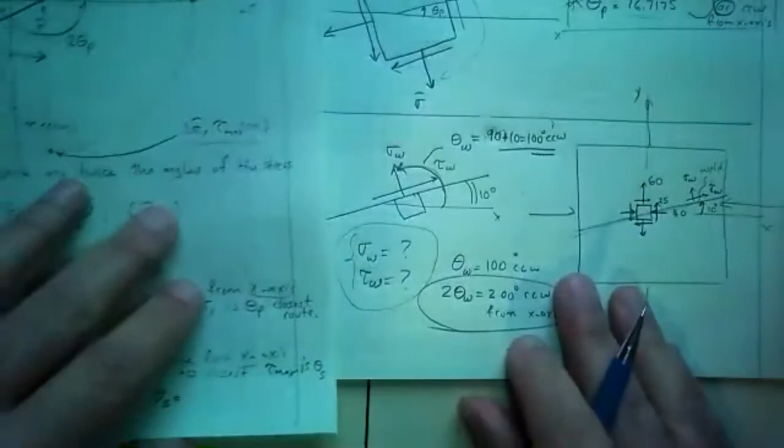But for now, I want to use a Mohr circle to determine the stresses here, which are 100 degrees counterclockwise. But in terms of Mohr circle, they're twice that—so 200 degrees counterclockwise from the x-axis. All right, so let's go on the Mohr circle. I'm going to expand this again, go like this. On the Mohr circle, from the x-axis, I am going to go 200 degrees counterclockwise. Let's see, is that what I have?

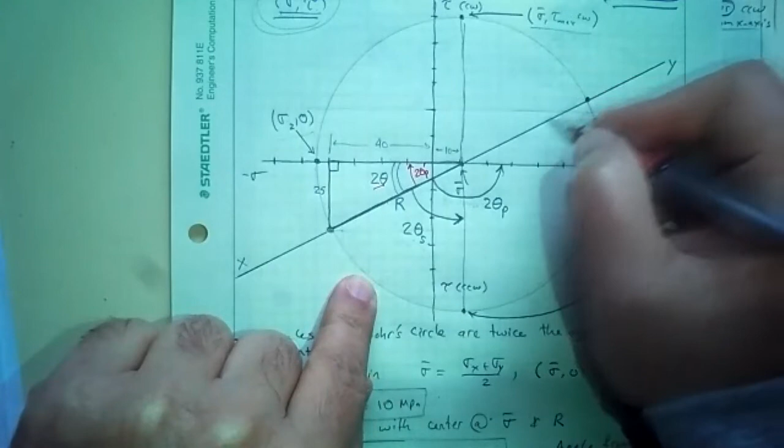That's fine. All right, so here's the x-axis. Counterclockwise is this way, 200 degrees. So look, I go all the way to here, it's 180. And I go—I'm on the perimeter, right? I'm on the perimeter, and I go 20 more degrees. So I end up, let's say I end up here. Again, I am going from the x-axis, draw a line, going from the x-axis, counterclockwise, to 2 theta w, which is 200 degrees.

The coordinate of that point is sigma w and tau w. Those are the things I'm looking for—the normal stress at the weld and shear stress at the weld. Well, how do I find that? I know this is the radius. This length, from here to here, is r. And based on this angle, the angle from this angle, this remaining angle here, is what?

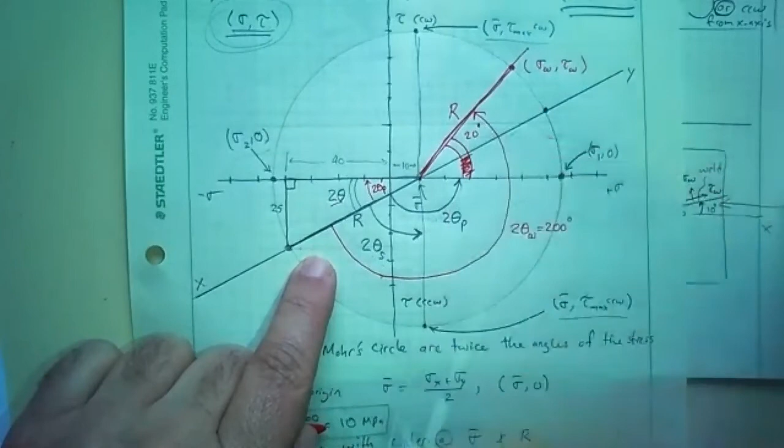180, that's 200. So that is going to be 20 degrees, right? This angle—well, I didn't want that. I want this angle. This is 20 degrees. That angle is 20 degrees. That's okay. And this angle is the same angle as this angle, 2 theta. And 2 theta is 26.57 degrees. So I can construct a right triangle.

This is the 90 degrees, so I'm going to draw the triangle here. So I have constructed a triangle. This is R, and we know what R is—R is 55.9. We know we just calculated this angle—this angle is 46.57, that plus that. So the height of this represents tau w, and the base represents sigma w, right? The base is sigma w, the height is tau w.

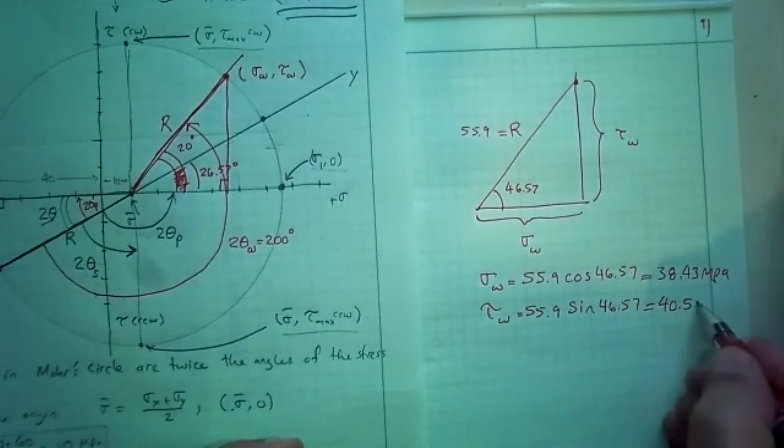40.595 megapascal. I need orientation of this. Look, this is on the clockwise. So clockwise. So there's the stress. There's the stress right there.

Clockwise, so I got that correct. I drew that, I didn't know that was the direction of it. Clockwise based on that. So if it would have said counterclockwise, I would have gone the other way. Clockwise like this. So those are the stresses at the weld.

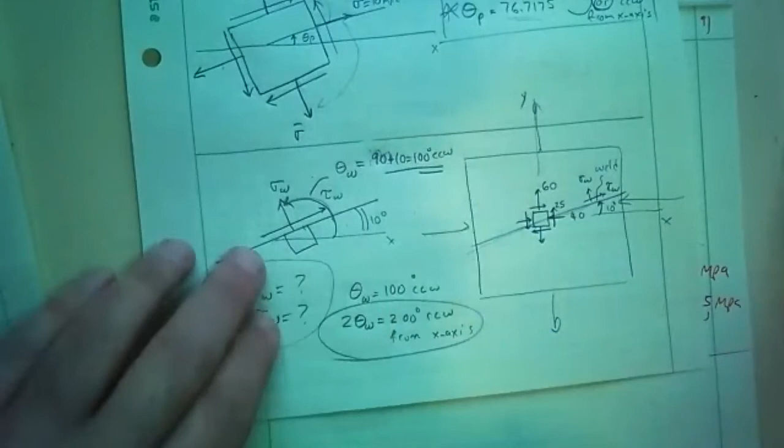This is the normal stress at the weld. That's the shear stress at the weld right there. And all predicted based on the perimeter of the circle. So again, the perimeter describes the stress at any state, at any angle. And we'll be using that throughout the rest of the semester.

I'm basically out of time, I got 4 minutes. Any questions for me? I know I went back and forth, but Matt, I know you want to write this stuff down. Yeah, I'm good, thank you. Okay. Any questions? I have no questions. Okay. See how nice this stuff is, how beautiful it is?

It's really amazing to me. It's just, and you don't need to memorize anything. If you know the process, you can figure it all out with a piece of paper and some tools, or you don't even need to have any kind of circle, what do I call this, compass, or anything like that. You can use a piece of string and a pencil if you wanted to, and draw all this, figure it all out. It's amazing how many students graduate from top engineering schools, I'm not talking about Wright State, top engineering schools, and still don't know how to do this simple stuff.

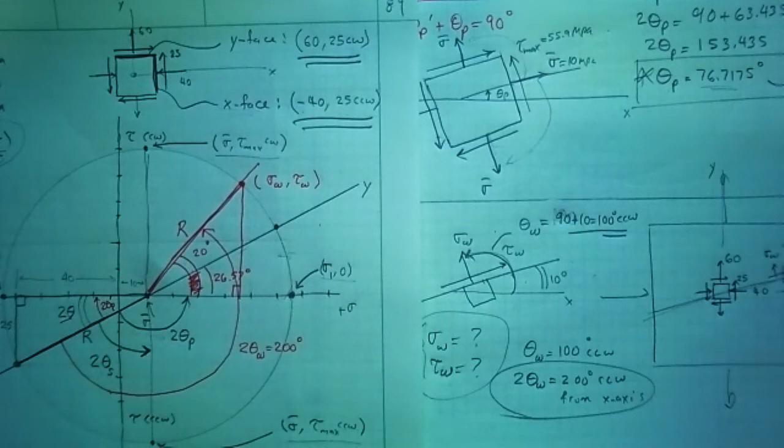It's amazing to me that I sat next to people from Purdue, Ohio State, what else, all over the place, all the top schools. I didn't have anyone from MIT, but when I worked for GM, they only hired the best they could get a hold of. And these guys came from all over the country. But it was amazing to me that they still couldn't do a simple analysis like this.

Now, how did I get a job coming from Wright State and sitting amongst all these people from top engineering schools all over the country? Because I knew my stuff. Because even though I came from Wright State, I really worked hard to get to learn this stuff.

I know most of you are going to Wright State, but that said, I'm going to put this in perspective. Wright State's not the best engineering school, but at the same time, you can learn. You can learn this stuff. Work hard and learn this stuff. And that's it, I guess. Learn the stuff, and you can be amongst some of the best engineers out there.

Not that all of them were like that, but majority of them were, of the engineers I worked with. Didn't know how to do calculations or figure things out, but still they did it, I guess, somehow. They became managers, or they usually excel at whatever you're good at. That's my philosophy. Anyway, keep in mind, even though you're going to Wright State, that doesn't mean you're not going to learn the stuff. Just do it. Work hard and learn the stuff. Read. The book, all the information is in the book.